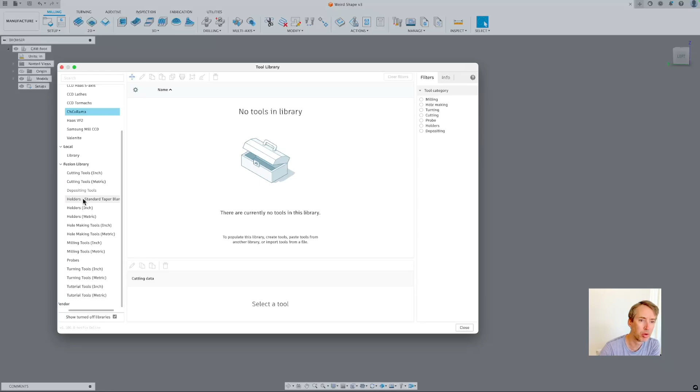So I can just add some tools. Let's look for, as an example - this is the Fusion library, and most people have done this by now if you're watching this video, but I'm just going to go through this. Milling tools inch, I'm going to do milling, let's do a flat end mill, and I'll do a half inch flat end mill.

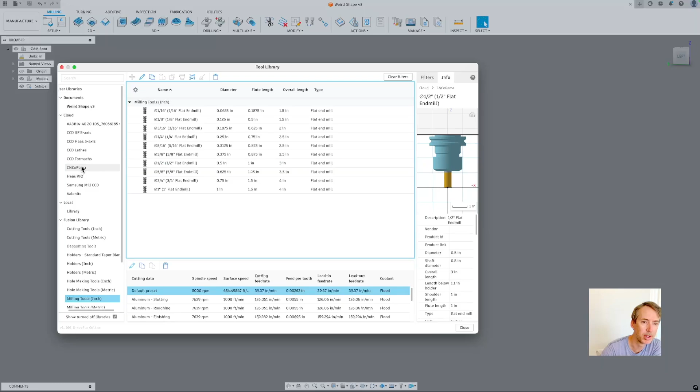In some cases, you can drag this straight to your tool library. Let me drag it straight to your tool library. So I have that now.

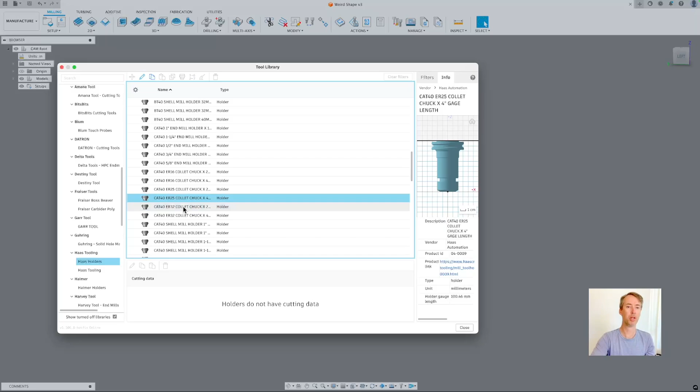And then we also might need a tool holder for that. If you go down far enough, we have these vendor libraries. I'm going to look down there, and I'm going to look for a Haas tool holder. Clear filters, and I want like a Cat 40, ER25, something like this. You should use what you actually have in your machine. Don't just follow what I'm picking.

But if we do copy, right click and copy holder, and then come back to your tool in your cloud library, you can right click and apply holder to tool.

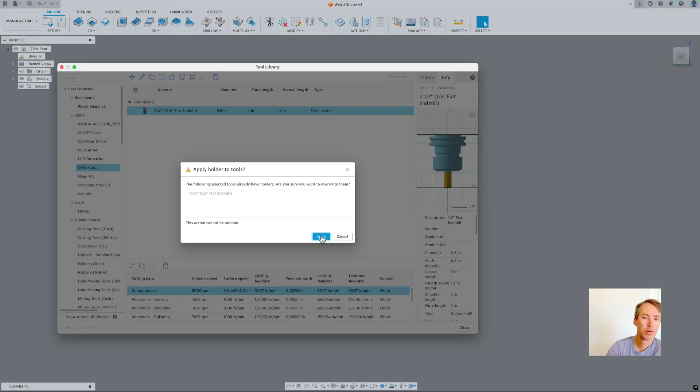Now if we look at this, the holder's there. So there's some other details here, like the cutter - the length below holder is important.

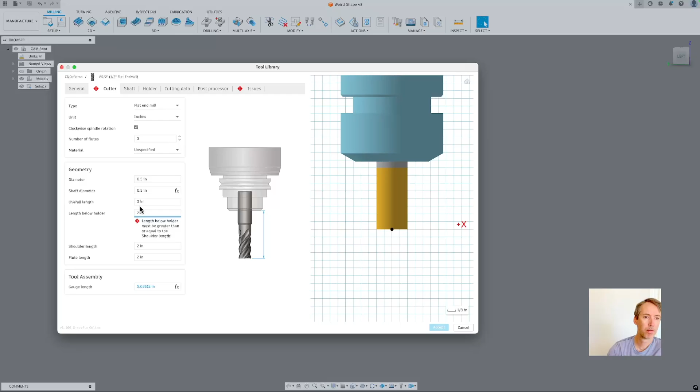So I want to make this a longer end mill. Let's do flute length of 2 inches. And if I'm going to do that, I should also make the shoulder length 2 inches, and then length below holder should be a little more than 2 inches. So maybe I'll do like 2.25. Overall length should probably be more like 4 inches if I'm doing that.

All right, so this is my tool holder with my tool in it. Since I grabbed that tool from the Fusion library, it has a bunch of speed and feed data in it already. And maybe I'll just call this tool 1.

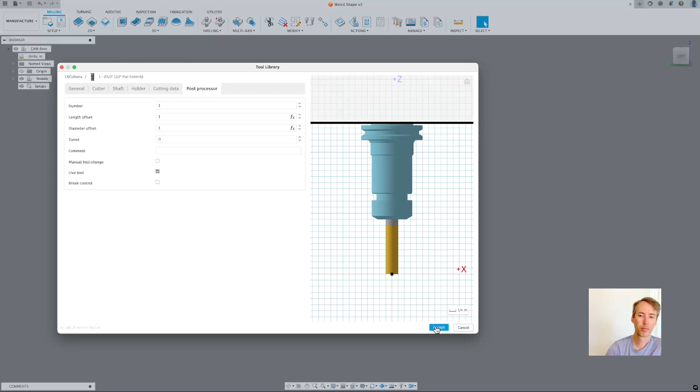All right, so that's how you can get a tool in your library. If you can't find the tool in this list of vendor tools, the tool holder - this is a really good video. You should check this out.

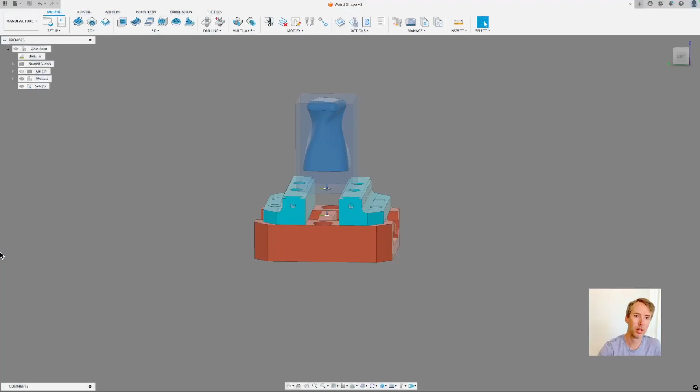So to find this, you just have to search like CNC or NYC CNC upload tool model Fusion 360. This is where, if you find the tool model from the vendor, which is pretty easy to do, this shows you how you can upload it, because it's a little bit different process than just uploading the CAD file.

All right, so when it comes to 5-axis, the more you can precisely model things out, the better results you're going to get, and the more likely you are to detect an unwanted crash.

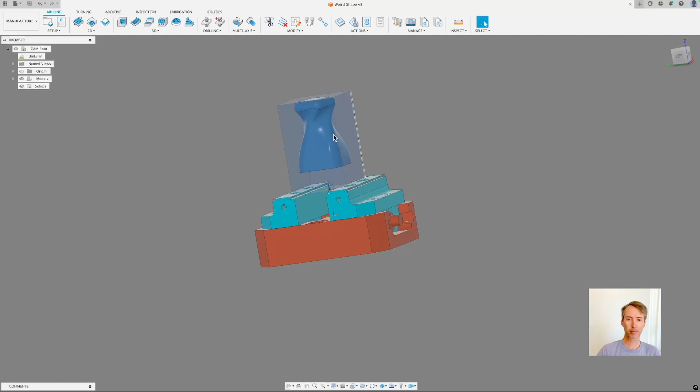Okay, so before we get too far into this, there's one thing we forgot to do. We needed one more joint origin at the bottom of this to use as our fixture attachment when we go into the machine. So I'm going to go back to our original vise here.

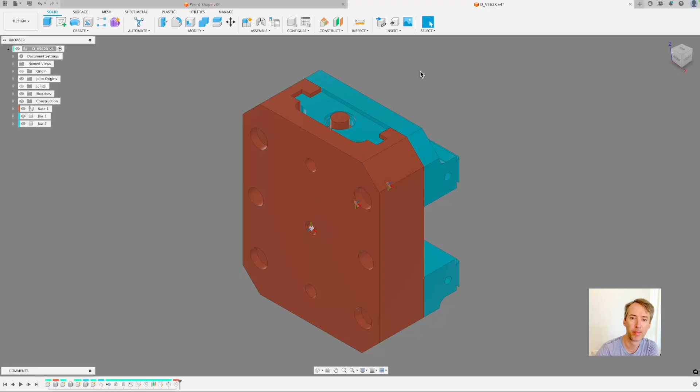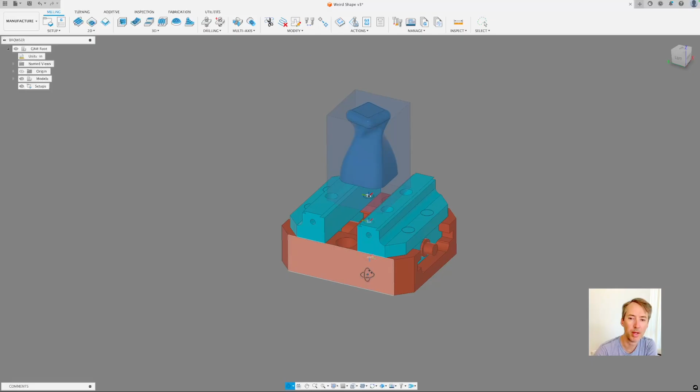Under assemble, do a joint origin right at the center of the bottom of the vise there. So now we've got 3. And then if we save that, we can close this. Up here, that tells us we have an out-of-date referenced model. So we can click that, update this. Okay, now we're good. We have a joint origin down there.

Okay, so I'm going to do a new setup. I'm going to select my machine, and I have this here ready to go.

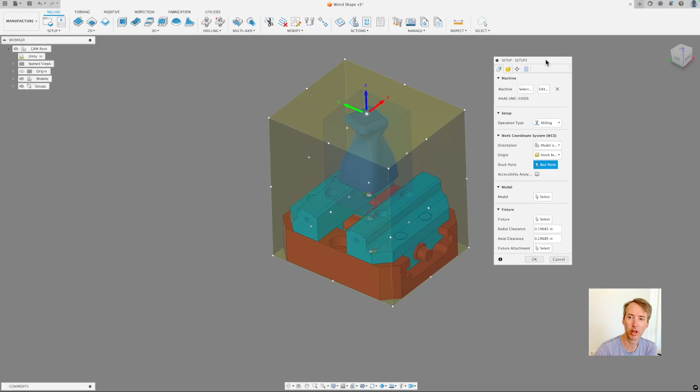So we have the wrong model. It thinks our model is this entire thing, so I'm going to reselect the model. I have my stock here still. If I just click here, it's going to think the stock is the model.

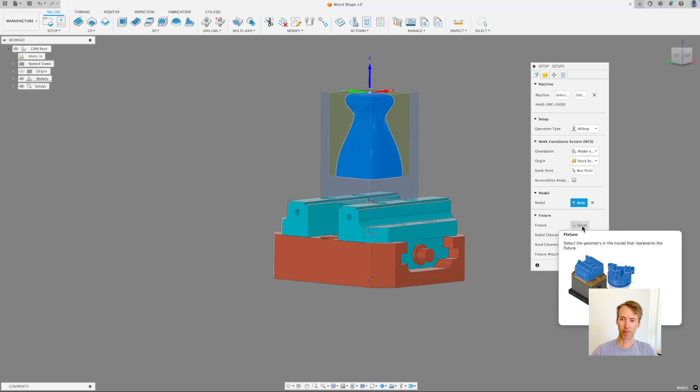So if I do a long left click, I can now select body 1 as my model. Then we need to select our fixture, which has 3 parts for the fixture. And then the fixture attachment is this new joint origin we put down there.

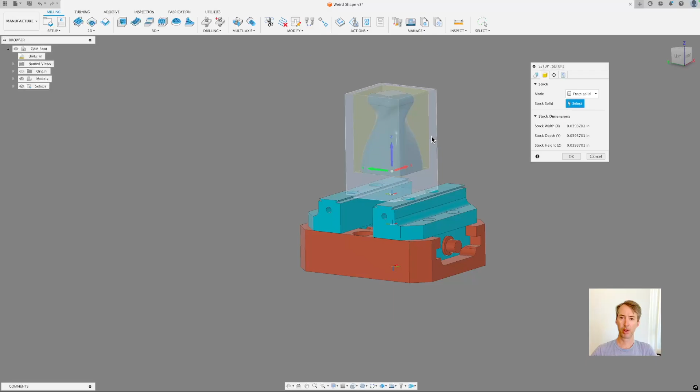So now if we come to stock, we're going to do from solid, and then just pick this. Part position, we don't need to worry about that right now.

And then usually your WCS, you would put a 1 here for G54. Since we're using the machine here, it wants a 54 for G54. So I'll say okay.

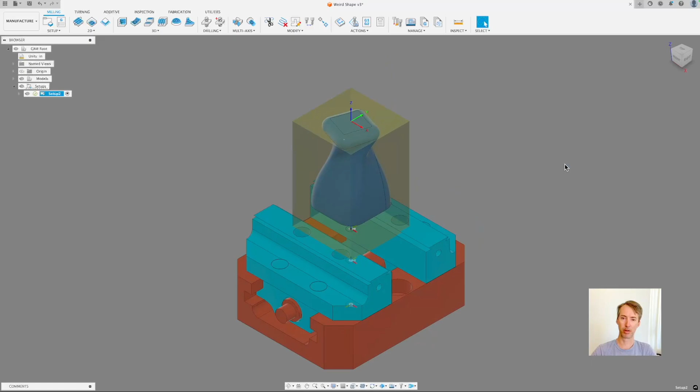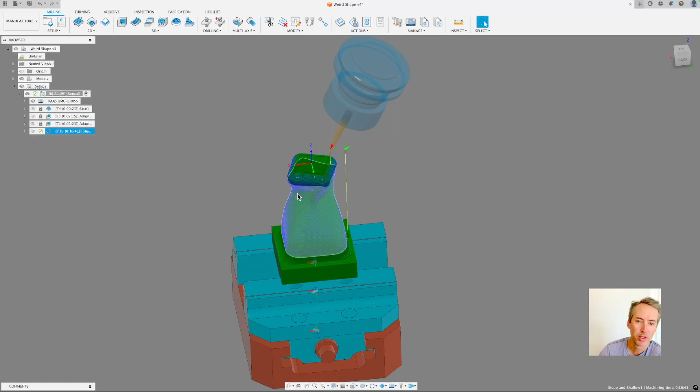All right, so I got some tool paths in here. I'm doing facing on the top, then I do roughing from one side, that's with the tool orientation and adaptive. I do the same roughing on the other side. Then I'm using a steep and shallow just to clean up the whole edge. And I did steep only. I think I set the maximum tilt to 60 degrees.

So let's see if we simulate this, what we're going to get. All right.

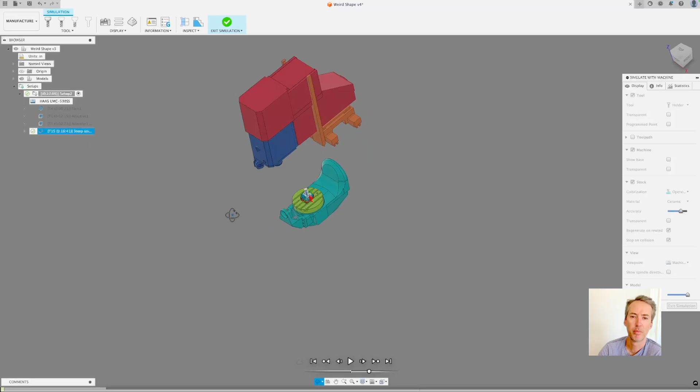So we're in here, this is our machine. We're actually looking at the back of the machine there. And with a machine you can do show base. You can make it transparent, which doesn't really help that much. But if we unclick show base, usually that's kind of all we need to see.

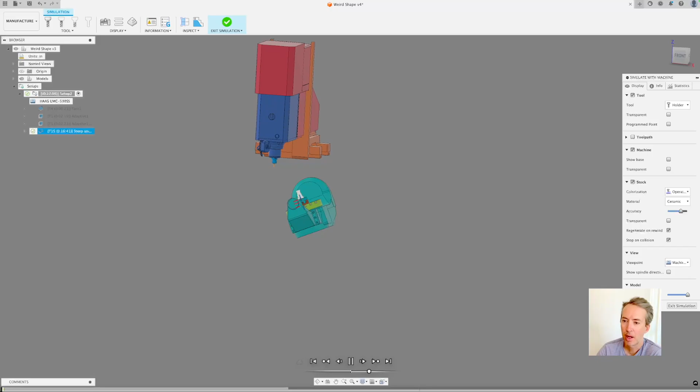And then we can just simulate this. We want to turn on stop on collision, so if there is a collision, sometimes it's hard to even see it, but we want to make sure it stops for us and we can see that collision. If there was a crash, I'd see a red line down here somewhere, and I'm not seeing that. So that's good so far.

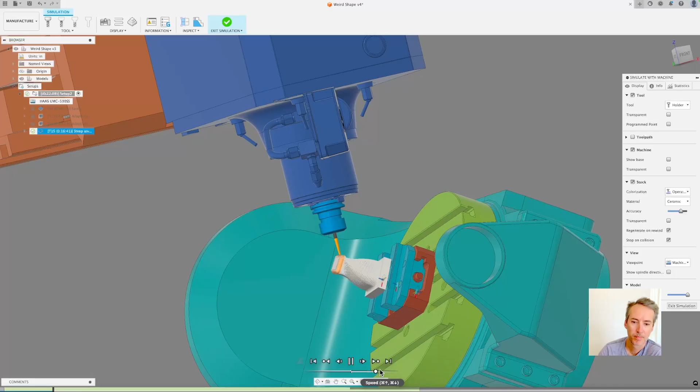Another thing you can do is right click and protect these tool paths once you're happy with them. Let me unprotect this and let's see if we can make it crash.

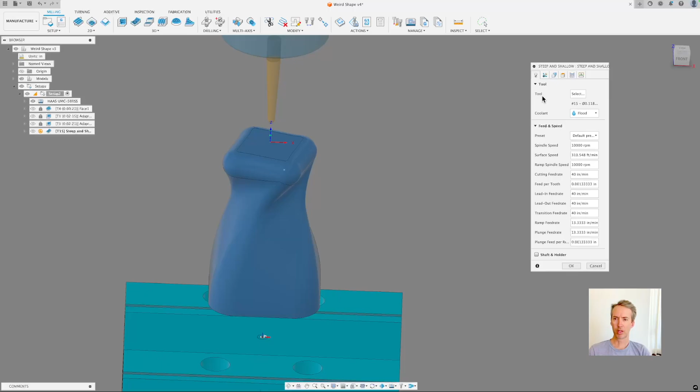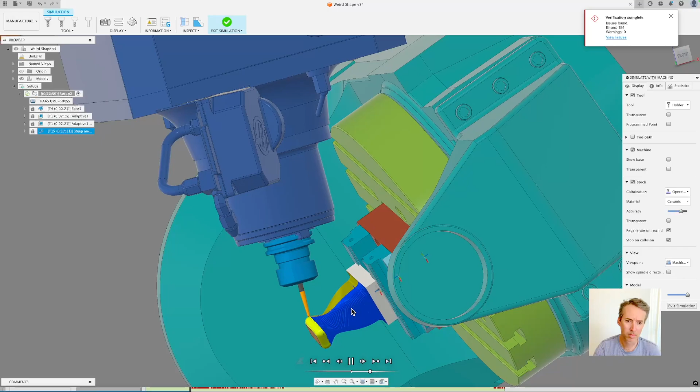So I'm going to change the tool axis limit to 120. All right, here we are in the simulation. I pushed the max tilt a little higher, and you can see down here we already have a bunch of collisions. So it looks like the head collides with the C-axis table there.

All right, so a few other things that come to mind. You can actually probe your vise. Probe your table first maybe, and then probe your vise and find out the exact location of that vise on the table, and then dial that in your setup.

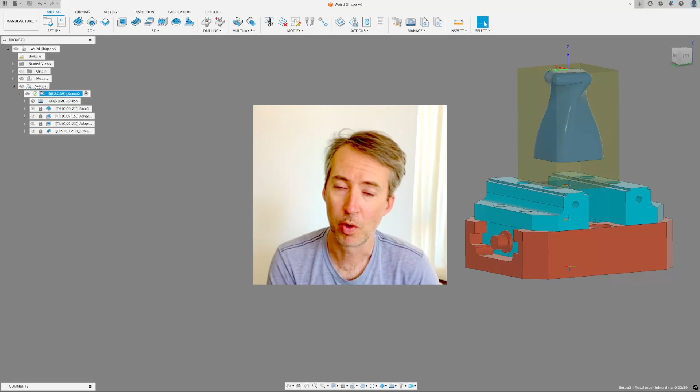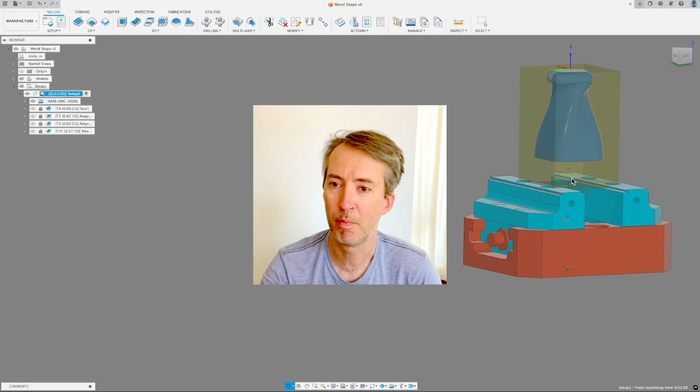Or with the joint origin that you put on the bottom of the vise. And then the other thing is you might want to think about where your origin is. Right now we have the origin set to the top of the part, or the top of the stock. That's really not a very precise location. So for 5-axis, it might make sense to put your origin like at the top of your vise jaws and then the center of your part, or the center of your vise.

I'd actually be curious if you have experience with this, where you put your origin when you're doing these kinds of things, or where you think would be a good idea to put the origin.